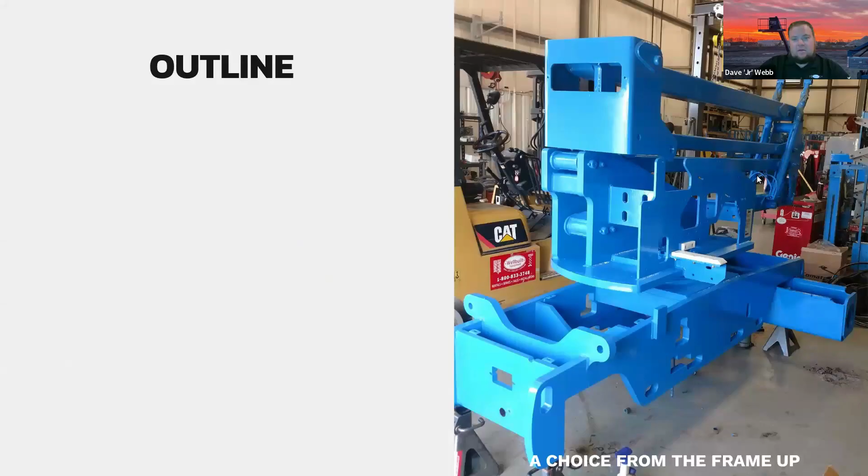So a little bit of an outline here about what we're going to go through. I'm going to do a little bit of the who, what, and where. So who are the key players in our industry, our factors in determining what MEWP we use, how to choose the right equipment, and then, of course, we always leave room for questions because that is our favorite part.

So let's go ahead and dive in. Here on the side, this is one of our machines. We took it frame all the way down to do a recon for a customer. And that's kind of the way we look at lift choices - they have to be from the frame up.

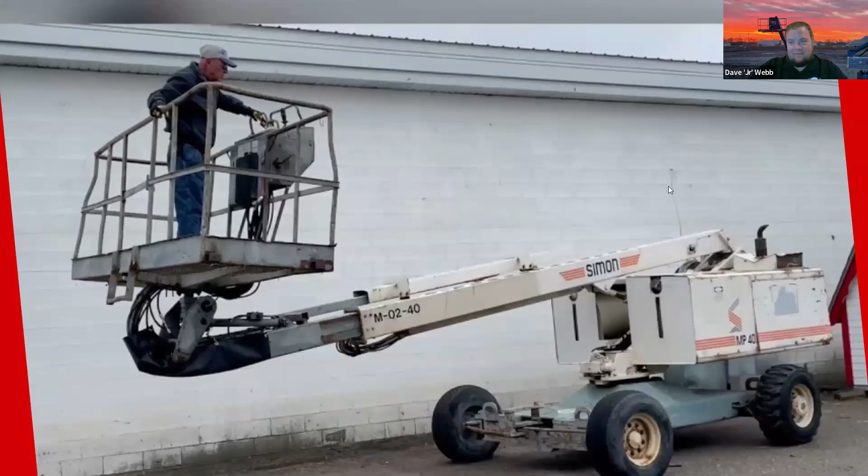So right out of the gate, I want to share this old photo for some of our older industry guys. You may be familiar with the old Simon MP series. This is back when the contractor booms were kind of in their heyday in the 90s. You can see not much safety devices, not many features on this machine.

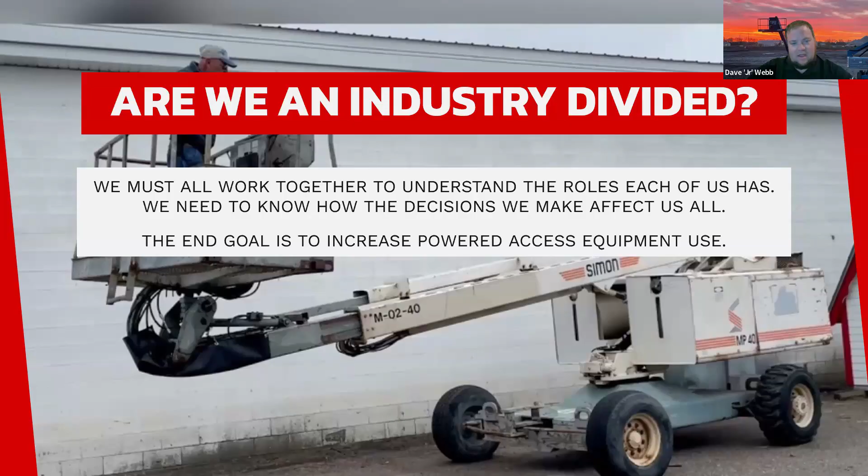So the question we have always on MEWP selection is, are we an industry divided or one that's united? This comes from a couple of places. We all have to work together to understand the roles each of us has. We need to know how the decisions we make affect us all, and the end goal is to increase powered access equipment use. Together we can change the industry and change the game.

That's our motto, always at work. And the idea behind that is we want to eliminate ladders on job sites. The ladders last initiative for us is something we really, really take pride in.

What this does is establish what everyone's responsibilities are, giving everybody an idea of their overall position in the industry. It helps us avoid blaming each other when problems do arise, and helps us understand that we all have to work as a team because we're all seeing the same problems, whether that's from a manufacturer, a standards organization, or all the way down to an end user. There are common pain points that we're all having right now.

So here we go. This is who is involved in the MEWP selection process. Starting with our standards boards and organizations, that's where the industry guidelines for manufacturing of equipment, training, and certification start. Then into a manufacturer, who designs, engineers, manufactures, sells, and provides support.

Then we have a couple of different types of equipment owners. In our industry, we really separate a small rental company who focuses on general rental from a larger rental company who has access-specific operations. And then also the equipment owners who are an end user, or COM as we call them — those would be people who decide to purchase a MEWP for their own company use or location.

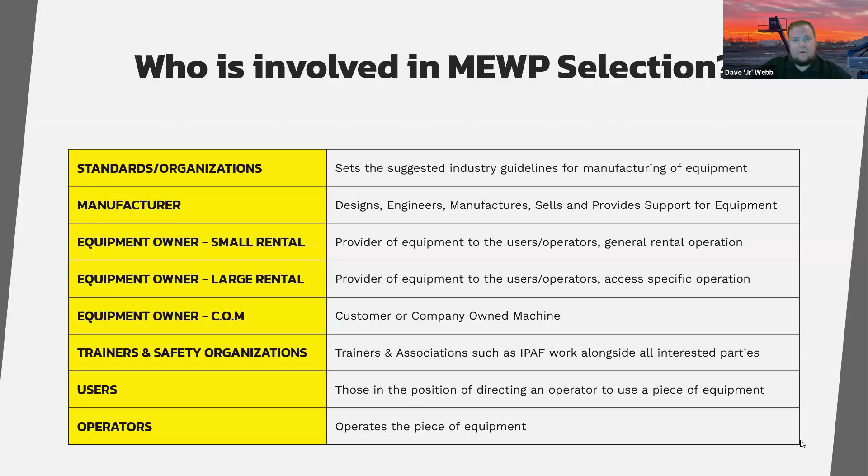So we're going to get into the what of the equipment. This is how we break down our four most common types of MEWPs. In this case, we're talking about things that are not truck-mounted units and not mast climbers, because in the general rental and equipment environment, those are kind of two separate categories. The truck-mounted guys almost have an easier time choosing a machine because they all have similar operating characteristics — it's more about height and reach — versus these other types of MEWPs we focus on in our training, which are more specialized in where they can and can't be used and the different types of things they do and perform.

So we break those down as scissor lifts, boom lifts, outriggered machines, and then push arounds — or as we like to call them, the new guy lift, because it's really fun to put the new guy up in a push around.

Then we have the where of how the MEWP selection occurs. On the side of people who aren't directly involved with end users, we consider that an office decision — that's your standards like ANSI, CE, OSHA, organizations, engineers, and manufacturers. I have a nice generic photo of a guy with some blueprints here. We have an equipment rental yard or a retail yard where someone's selling the equipment, and then, of course, we have work sites where hopefully, if you choose the right thing, you don't end up burying it down to the counterweight.

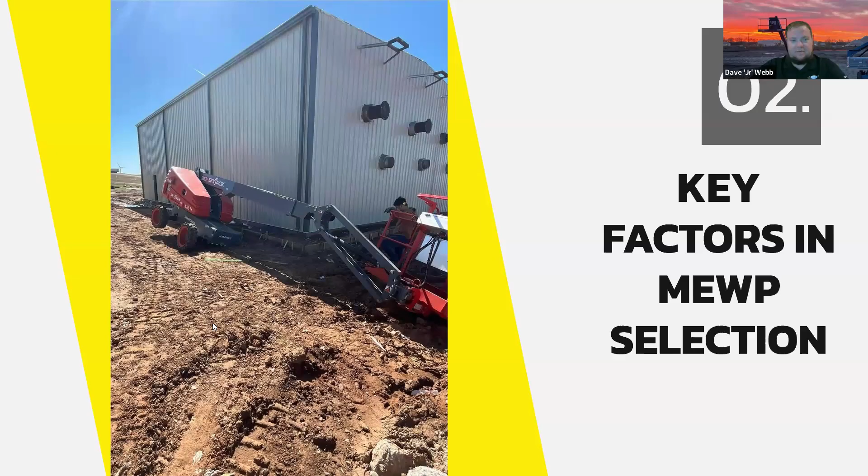So now we're going to get into our factors that we consider in MEWP selection. You can see right here, somebody made the unfortunate choice of driving too close to the form work and sunk a wheel on this machine. Here we kind of go into the details.

So what this is, so everybody knows, a lot of our presentation is going to be from a larger rental company standpoint, but we also work with small rental companies as well. I know everyone's factors are going to differ. The idea here is to show how we view those common points and how we can unite behind them to make the industry as a whole better.

So at the top of it, we have the price or cost. And that doesn't just include the initial purchase price, that also includes how we maintain it and the longevity of that product. Transportation and storage. How does it get to the work site where it's going to be used and where is it stored? So in an end user situation, it might have a different storage location than a rental yard or retail.

Availability of equipment. Is the ideal machine that we want to use available to use? Can we substitute it? And then we get into the height, reach, worksite conditions, and ultimately end user preference. The end user preference thing has become more and more of, I wouldn't say an issue, but a solution where the end user becomes very familiar with a brand. And because of that, they're used to its operating characteristics and don't want to change. So we're going to dive into the details of each of these here next then.

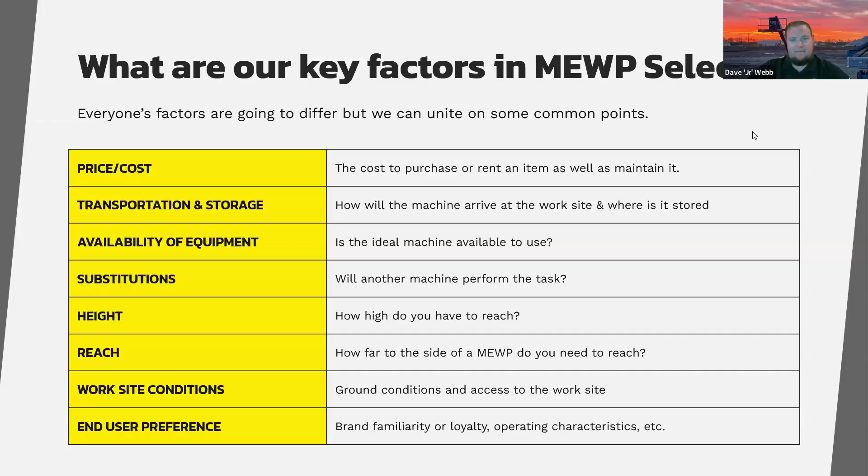So the main factor we're all united on, of course, is the dollar. And it's very important to everyone. The bottom line ultimately is determining a lot of business decisions. And that's why I always start at this point, is it seems like the dollar and the cost of something is unfortunately the ultimate deciding factor for anyone. And we'll kind of tie that all in and circle it all back.

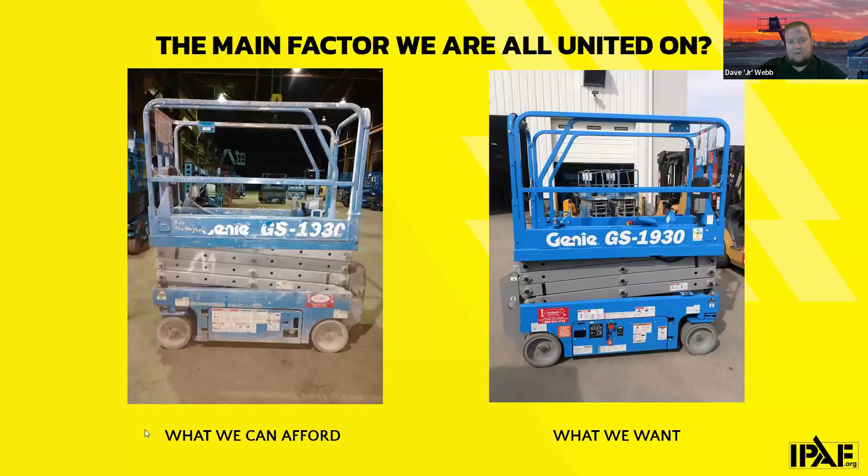So a little representation: when we sell equipment, we have this thing that occurs of this is what someone can afford, and what they actually want is a brand new machine. That big gap that we have is a lot of what causes the selection process to go away from its focus and towards a monetary decision rather than an informed product specification decision.

So what I do here now is we're going to break down how each of these things affects, from our point of view as a rental company, the big key players in our industry. So how does price affect our selection of equipment? From the way that we see it as a rental company, a retail service sales company, safety training company, this is our perspective. Again, yours might differ a little bit, but this is kind of how we view the whole process. On a standards board, standards must meet minimum requirements, and they can't be too costly to implement in design, and they can't be costly to adhere to after the delivery.

From a manufacturer's standpoint, they need to meet standards without adding extra cost. Raw materials and bolt-on costs ultimately determine product features, and then the price must be competitive in the market, especially with so many new companies entering it right now. On the rental company side, everything comes down to that low cost of ownership and low acquisition cost. Whether we want to admit it or not, ultimately, lower rental prices open up more opportunities for us as a rental company. It's not necessarily the product selection. It always comes down to whether or not the customer can truly afford to get that piece of equipment.

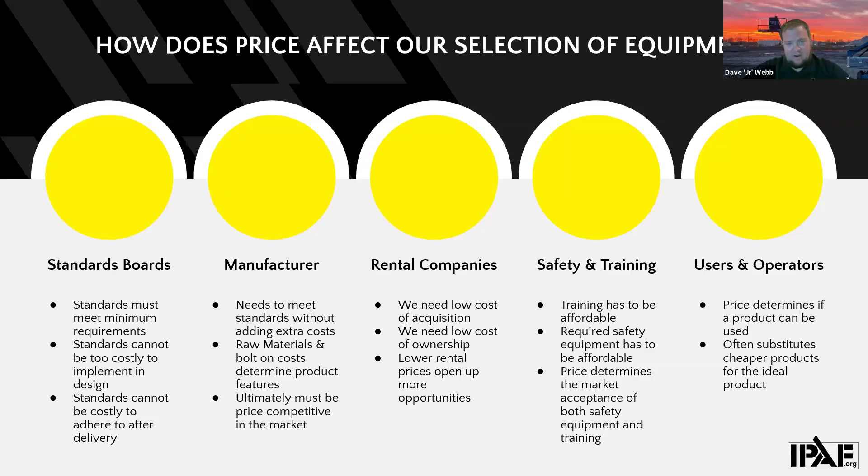On the safety and training side, the training has to be affordable. So part of that is if training takes too long, customers are less likely to do the training because it costs them to have their guys in a training session. Required safety equipment has to be affordable, and price determines the market acceptance of our safety equipment and training. And then we have our users and operators. Price determines ultimately if a product can be used. If they don't have the money in the job or repair, they can't do it. And they often substitute cheaper products for the ideal product because of that.

So this is what I call the results side of what has happened to higher prices without added features. In other industries throughout the years, what we have seen in equipment is an increase in features that have ultimately gained something for the operator. For example, right now, if you want to go buy a skid steer, you're going to get an enclosed cab with air conditioning, heat, backup camera, extra safety devices, maybe a Bluetooth radio, high flow, higher capacity. All of those things that are added ultimately justified an increase in cost. Whereas in the aerial lift industry, we have seen large increases in costs throughout the industry from the manufacturer all the way through an end user without getting a lot of huge advantages to that.

So, on the standards side, when standards become too costly to implement or take too many resources, we lose innovation and product features. As an example, load cells on lifts did not give operators more, they actually took it away. And we know that people were overloading the machines. It's commonly known, but right now we have an issue that customers will only take older machines because they know they can overload it versus a new one.

On the manufacturer side, when price is the sole focus, a brand no longer becomes a selling point on features, but instead becomes a commodity with no product separation. The focus on selling at the lowest price without giving us the better product has really caused an issue where all we have is a bunch of the same product with different paint schemes, really, and some different bolt-ons.

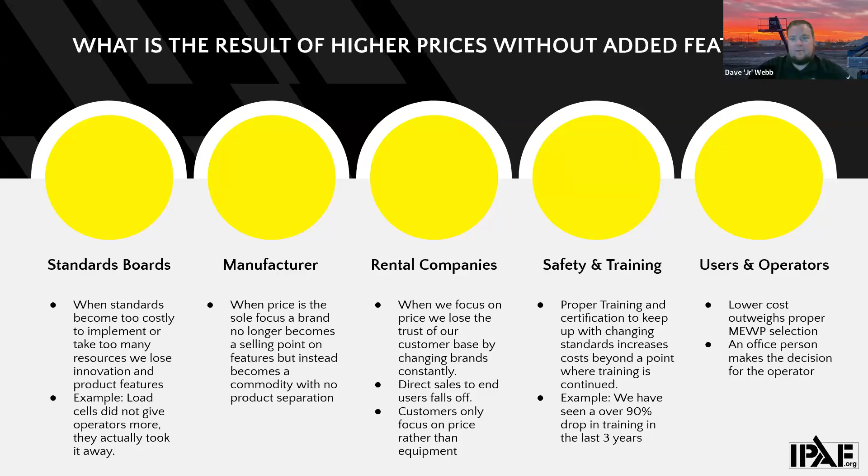So then we have transportation and delivery of the MEWP. And again, this is our stuff that we have. If you go state by state in the United States, if you travel to Europe or you're in Canada, somewhere else in the world, obviously the road limitations are completely different than what we have here. For example, the commercial driver's license limit in Europe being 3.5 metric tons versus here it's much larger. So when we're trying to decide what MEWP a customer can ultimately use, we have the weight to consider. So what are the vehicle requirements that they need to get it there?

If we stay under 6,000 pounds with a trailer, there's no need for electric brakes. That's a much larger customer base who can then tow it. If we go under 10,000 pounds, including the trailer, they stay under a commercial driver's license. That trailer does now have electric brakes, but we still are under that limitation where they need to go through the process to get a CDL. On most of the rollback trucks, unless you get a high capacity one, you're maxing out at around 26,000 pounds. They may hold more, but they'll never scale, especially with a boom lift on there and all the counterweight forward.

And then we go up to our tractor trailers where they're under 48,000 pounds for our whole load without having to pull a permit. And again, we have axle limitations as well. So if we're overweight on an axle on a larger boom, we have to pull a permit for that depending on where we're going. A good example of this would be booms above 125 feet typically are too heavy for us to carry without a permit, depending on where they're being delivered. And that added cost prevents someone from getting the machine ultimately.

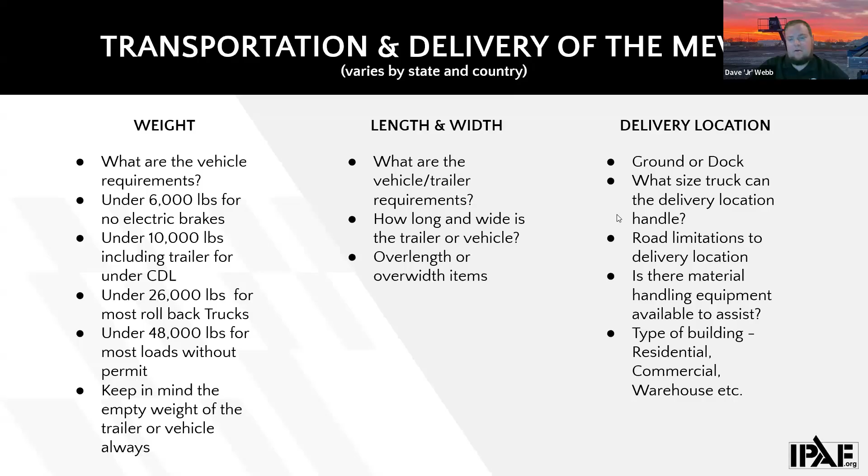So now we're going to go back again here. How is transportation and delivery affecting our selection of that MEWP? So a manufacturer designs and manufactures a machine based on the target customer base. If a machine meets the specs but cannot be delivered or requires additional cost to deliver it, it negatively affects sales. So a good example of this is in the chimney industry.

For instance, our customers need a large articulating boom, such as a Z80 from Genie or an 860 AJ from JLG. That machine allows them to reach up and over the rooftop, but we can't always get it there. So we're substituting a spider lift for those cases because they're lightweight and they won't damage the property.

If you're a smaller rental company, you may focus solely on customer transportation rather than delivery, meaning you're taking into account what vehicle they're always going to pull your trailer or their trailer with. Customer ability to transport may become the priority then in your decision making for what you give them. You might not have CDL drivers and you may not have larger trucks.

Then we get up to our medium to large rental companies. In our case, what we're looking at with equipment is, are we going to need to purchase more trucks or trailers to keep up with delivery demand? Is a large enough truck available for that day to do the delivery, or are they booked out? And then can that truck, since we're going to a larger truck, fit into the delivery location like we were talking about?

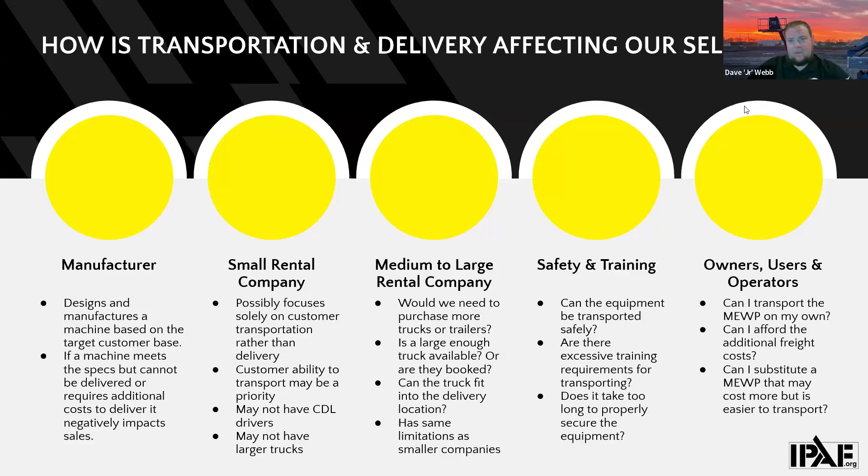Then we have availability. So availability for us is huge. As we say at our company, one is none, two is some. So buy a truckload, which a manufacturer I'm sure loves to hear. Again, this is from our point of view, how we view the availability side.

On the manufacturer side, is there a need to make additional models? Do those additional models compete with existing models? And can we get a more diverse product line to our customers without increased overhead? Obviously, we all know and are aware as owners and operators of equipment that that design cost and the upfitting to do manufacturing on an industrial scale is extremely expensive and cost prohibitive. And that's a hard decision that many companies struggle with to see if the market viability is there before they start to make it available.

On the small rental company side, what we see is they have a limited MEWP fleet. They may only have one MEWP in a product category, and they're often substituting a different machine. The primary reason for that is they either do not have the capital to invest in a diverse product line, or they don't need to.

A good example of a small rental company is they may have one push around lift, which could be like an AWP 30 from Genie, as compared to having an AWP 20 and an AWP 30. They have the one. They may only get a 26-foot narrow electric scissor lift instead of the more common 19-foot scissor lift because they only want to own one of that unit. And the same thing transfers to rough terrain scissor lifts and to boom lifts and to tow behinds.

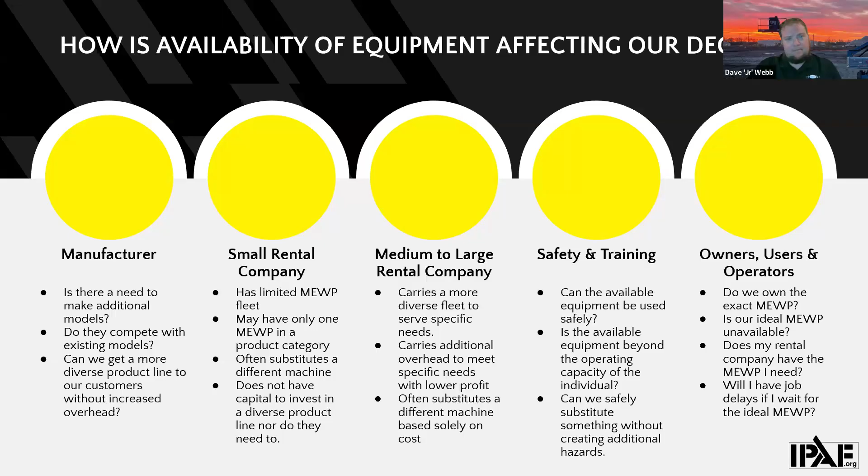So availability goes into substitution. On the manufacturer side, are we making MEWPs that are too easy to substitute for and do not serve a specific need? As an example, a micro 19 can often be used in place of a standard 19. A 32-foot scissor is often bought in place of a 26-foot scissor to increase our utilization.

This is something I've tried to talk about multiple times, and it seems to fall on deaf ears, that we have the same number of 19-foot machines that we did 10 years ago. It's just that instead of having one version of a 19-foot machine, I now have four. Ultimately, they do serve specific purposes, but those increased costs and lack of utilization become the reason why we don't fill the other gaps that we really need to fill in a rental company operation.

So then our small rental companies, if substitutions cover most needs, they will not buy a specific product. Going back to the same example, they buy a larger model to cover a broader range of rentals. They often substitute a larger machine, as I said, and they often substitute a different MEWP, such as an RT scissor for a boom lift.

The reason why is maybe they only own one of each. Their regular rental customer comes in, the only one that's available is an RT scissor lift, and that's the one they take and adapt to the situation. Is that necessarily the safest option? No, but it is what happens constantly on a regular basis at a rental company.

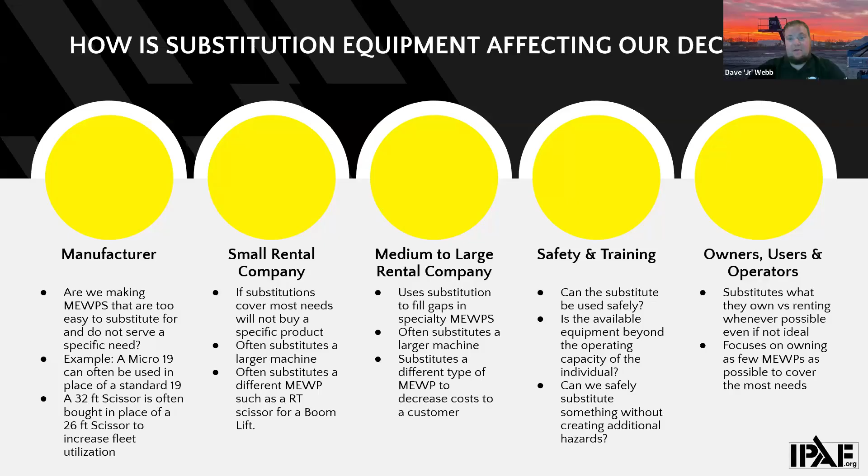But what if all those factors mean nothing? I can choose anything I want because we have hundreds of lifts to choose from. This is the scenario that we're in most of the time. Just like farmers, you've got questions, we've got answers.

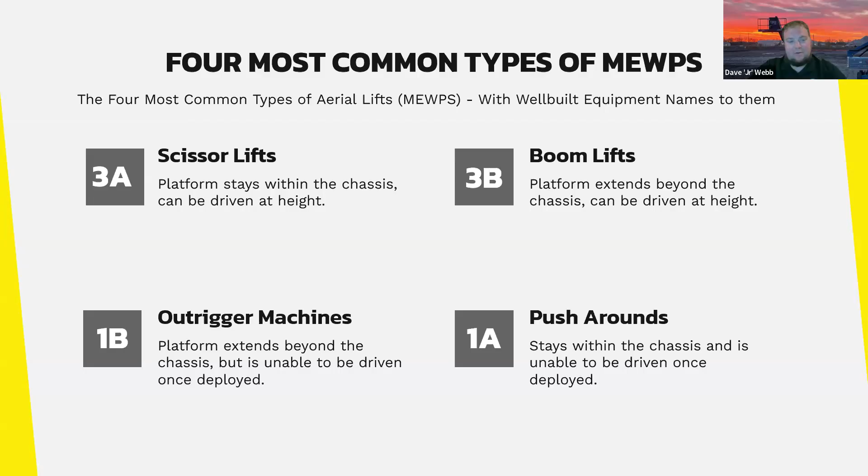So this is our chart of how our rental division would choose the right MEWP for a customer. Equipment specs ultimately fall into two different categories: our needs and our wants. Our needs are how high do we need to go, how far in do I need to reach, and where am I going to put the thing. So is that, how small is the door I have to drive through? Do I have to go through a gate? Is it only a dock delivery and the dock door is only 6 feet wide or something weird like that? And can I get there in those conditions?

On the want side, we have capacity. And the reason why we separate capacity into the want side is almost always we can increase capacity by getting a customer an additional piece of equipment, or we substitute a material handling device. So that would mean the customer, if they're a garage door company, they really could use a scissor lift if it picked up 2,000 pounds to install a roll-up door. Ultimately, they end up getting a small scissor lift and renting a forklift to go with it. So we separate capacity as a want because it's easier to solve a capacity issue than a height and reach issue. If you can't get up there, it's kind of irrelevant what you're bringing with you to do the work.

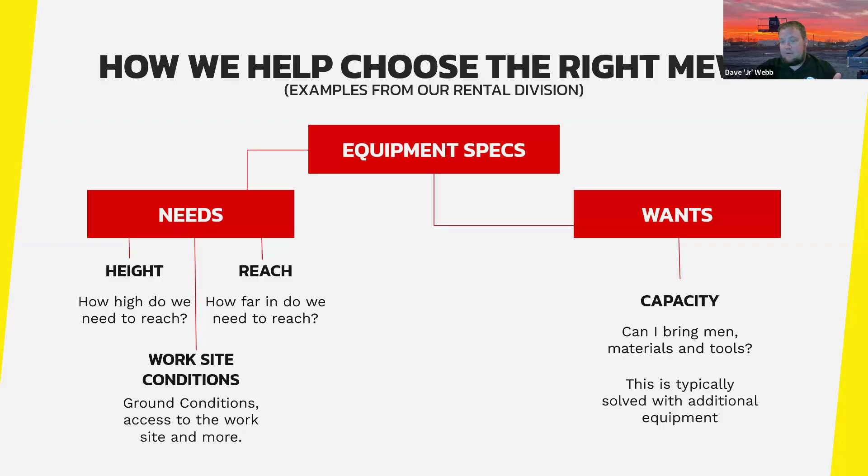So these are our tools of the trade. When we go out to a job site for a customer, we're using a laser measuring tape most of the time. If you don't have these and you're doing job walks for your customer, or you're an end user trying to figure out what equipment you need, we really suggest the Bosch series of them. The reason why is they have a digital level built into them as well, so you can use that to determine your slope in two directions very quickly and make sure that machine is going to operate where you intend on setting it up.

And then when we're outside, we use a golf range finder or a shooting range finder. The reason why we use those is they have a little bit of zoom and they're really accurate, usually within 3 to 6 feet. Buy a little bit nicer one, it's maybe $100 more. Don't cheap out on the golf range finder. By far, it is worth the $100 to $200 more to not have to send a customer a different lift and piss them off because you bought a cheap rangefinder instead of a more expensive one. We really like the Bushnell ones, they seem to work the best, but it's kind of a dealer's choice on what you really like to use.

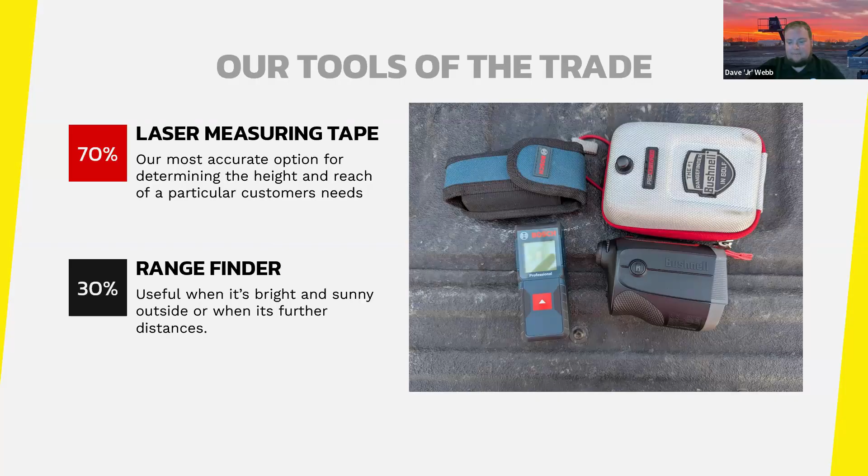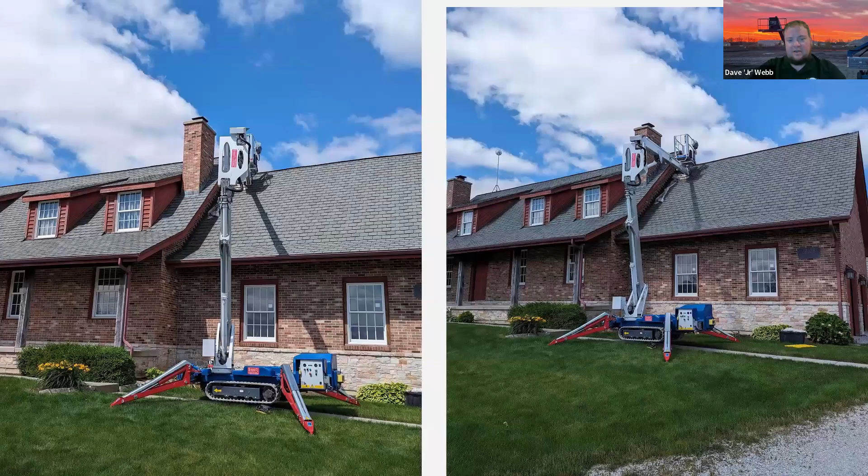There's a weight restricted road with multiple bridges. There was no other way to get to this safely.

Now, a normal person might say, I get the roof pitch is a little steep, but you could still walk it, you could set up a scaffold. In this case, these are brand new architectural shingles. They have very intricate designs on them. You 100% cannot walk this roof. If you do, you void the warranty.

So we are trying to help our painting contractor and the chimney guy reach up here. So what we do, because you can't get a clear line of sight right over the top of this, is we go to the end of the structure. We're going to measure in and then measure up from the end wherever we do have the clear line of sight.

And that's going to help us determine what piece of equipment will reach it. And again, you can see there's no driveway here. We easily could have just given him an 85-foot boom and he would have reached this no problem.

So when we do a worksite inspection, this is the same type of worksite inspection that an operator is doing. We identify the hazards and notate them. We measure the depth or reach needed. We measure the height needed. We examine the ground conditions. We physically walk the entire area the piece of equipment is going to be delivered.

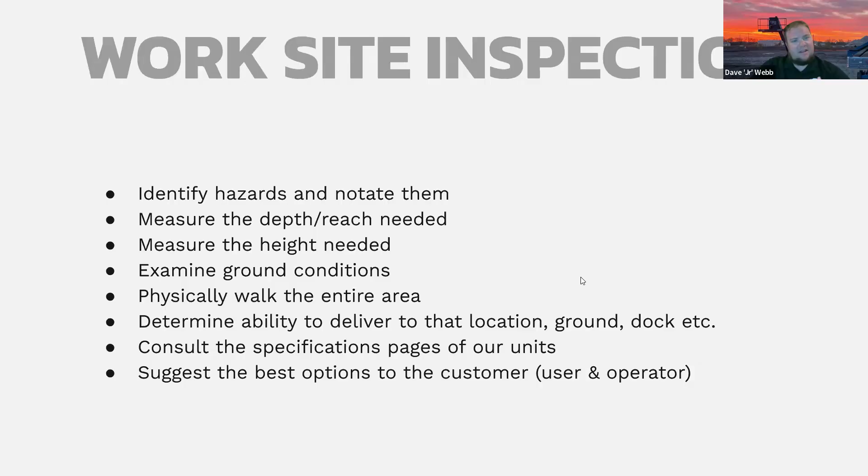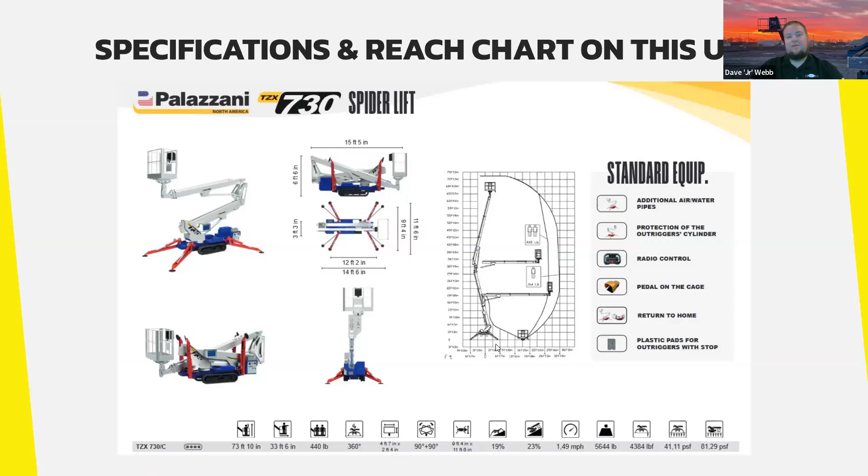So this is the specifications and reach chart page for this Palazzani unit that we had out there. So you can see here's our reach chart. It gives us our outrigger footprint. And of course, on this one, we really need to take into account where those outriggers land. We call that our net side reach. So everybody has a side reach, let's call it, in their spec sheet. We really care about where you can actually reach when up against the edge of a structure.

So again, we go back out here, you can see the customer had flower beds and landscaping they didn't want us in. Measured from there, did we reach where we need to go?

And the important thing here is not all spec sheets are the same. We say this time and time again because there's an incredible amount of dishonesty that goes on in a manufacturer's spec sheet. And if you have taken the time to go through the details of the spec sheets that we have with customers, or you have tested them and measured them, you know exactly what I'm talking about. Or worse yet, you've delivered a piece of equipment that should reach according to the reach chart where you measured to in great detail, but it doesn't even come close.

So we always confirm this with a function test. What that means is if we're using a piece of equipment and we're unsure, we have all of our rental fleet that we have tested it and measured it to confirm the reach chart is accurate. And any reach chart that isn't accurate, we have updated so we know the specific places that it reaches.

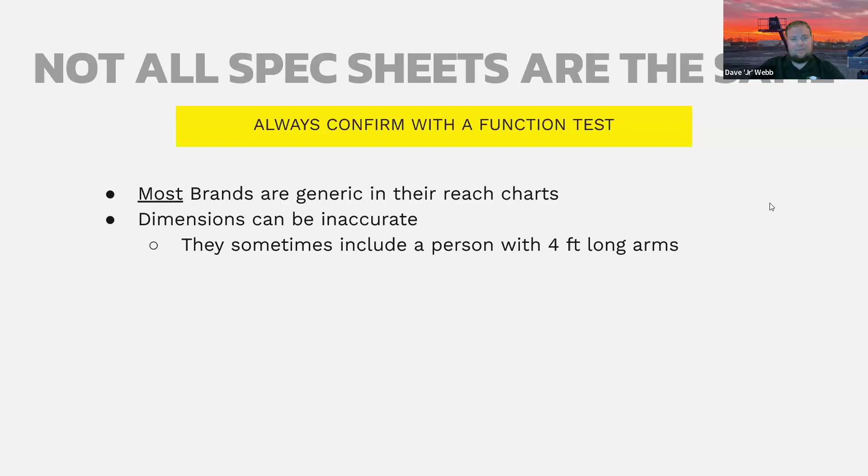Most brands are generic in their reach charts. The dimensions can be inaccurate. They apparently sometimes include a person with 4-foot long arms. Do not go by the model designation on the side of the machine. This is an important one that we hammer home with all of our customers. As an example of this, a 26-foot machine could only be 25 foot 6 tall.

Manufacturers do allow for tolerances in their spec sheets. It states that on every reach chart with a plus minus of what the range is, and the spec sheets can vary in the same year, make, model based on how those sensors are set up.

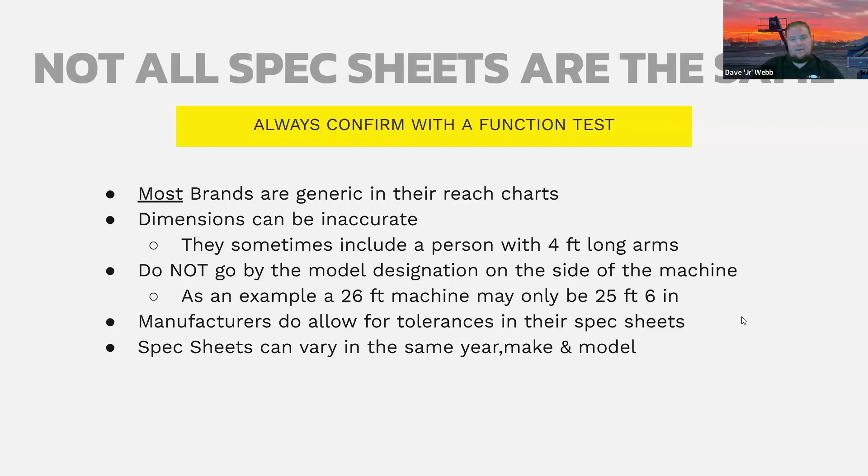In position function tests are important for these reasons. Again, if you guys have done the IPAF certification or training, one of the key components is to make sure the lift actually is going to perform in the location you set it up. As an example of this, your moment limiting devices on every machine ultimately determine where it will go to and how it will operate and if it will have that reach.

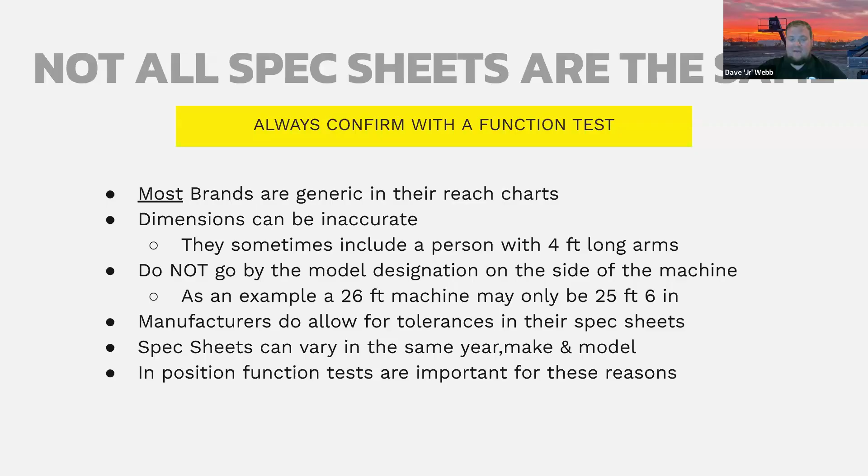Where you go to set the machine up, if you have a tolerance for a slope of only half a degree to get full performance in the machine you're using, but it turns out where it's set up is a degree and a half, you're going to lose performance in that machine based on where it is set up at.

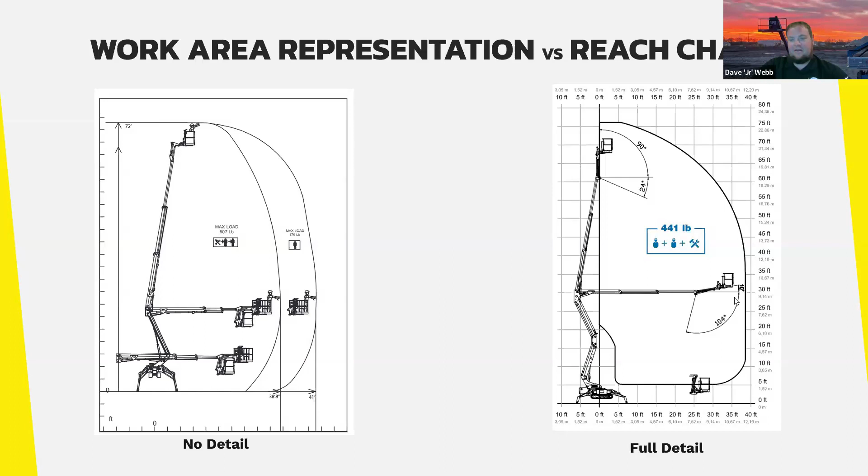So now we're going to get into all the different types of equipment. You guys will be very familiar with these if you're from the industry, so we'll kind of quickly breeze through them. We have some of the cool new things that we have here. We're usually pretty early adopters because we work in a lot of very old buildings, old warehouses, old industrial manufacturing facilities, and need a large amount of specialty equipment to accommodate our customers.

So in a Type 3A, we have electric scissor lifts. Then we go up to an electric mast lift.

If you're unfamiliar with these, the most common application we have for these is someone reaching over a mezzanine, over a window, trying to get up next to an air conditioner unit or an air compressor, where they can physically stick the base of the machine underneath the structure and then reach over the top. In our case, we keep these electric mast lifts from Genie with 3 different basket configurations to suit our customers.

You see here with no deck extension, that allows for maximum workspace. We have it with a deck extension, and then we also have a ceiling tile basket for this machine. So in this case, we purchased the extra platforms to have one machine that we can use for 3 different very specific instances for our customers. That increases your safety, and helps them get the exact MEWP they need without increasing costs to some other weird specialty piece of equipment.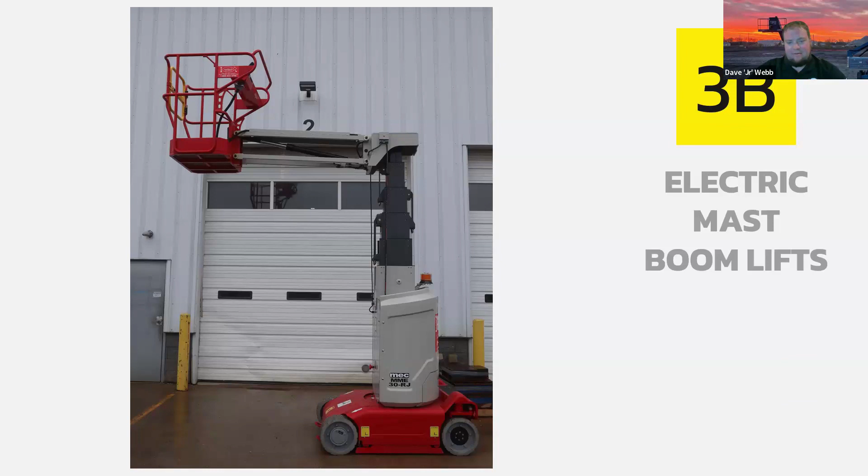Then we have electric mast boom lifts. So this is a hybrid of that Genie GR20 we had, and then our Z30s. This one commonly comes into play where we have low floor loading capacities. We need a narrower machine, or the customer needs to reach sideways and drive parallel to a wall or something that they're working on while reaching over another object. The biggest limitation to these types of machines is they can be slower and they also have limited basket capacity.

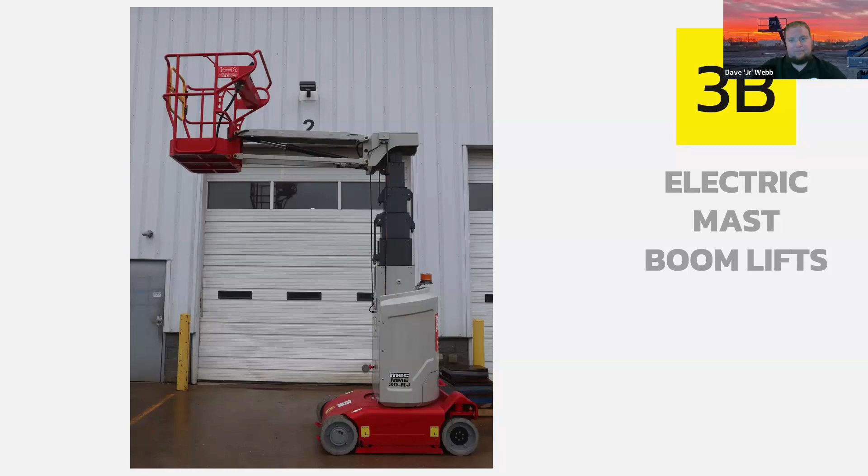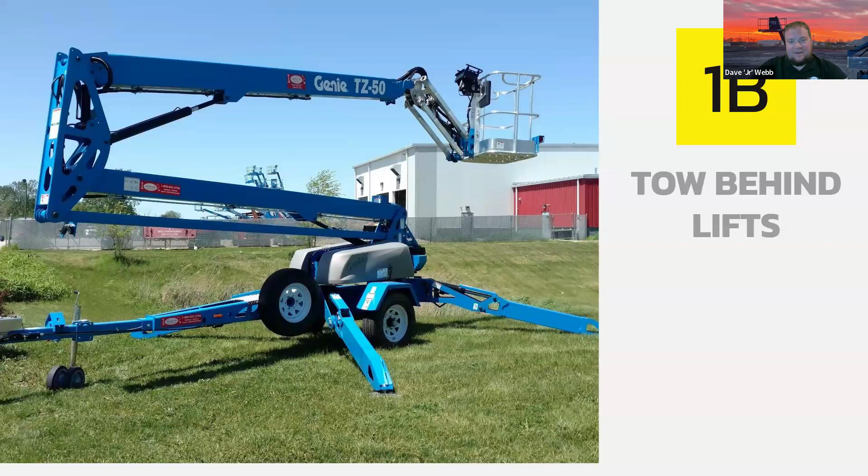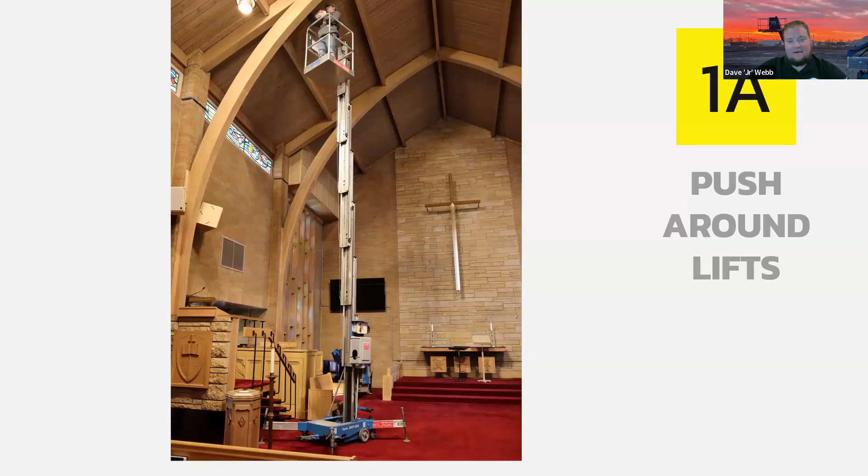And then, of course, we have push around lifts. Really, from our standpoint as a rental company and for our end users, while the push around lifts go back to the origins of the MEWP industry, they are an "I'm only going to use them when I absolutely have to" type of use case. For us, the most common place that these go is churches or schools or auditoriums. We also have straddle kits for our Genie machines to go up and over pews, for people who need to transport and tilt them back into trucks. In this case, they're very easy for us to get upstairs into buildings, and that's the primary use case for AWPs in our fleet.

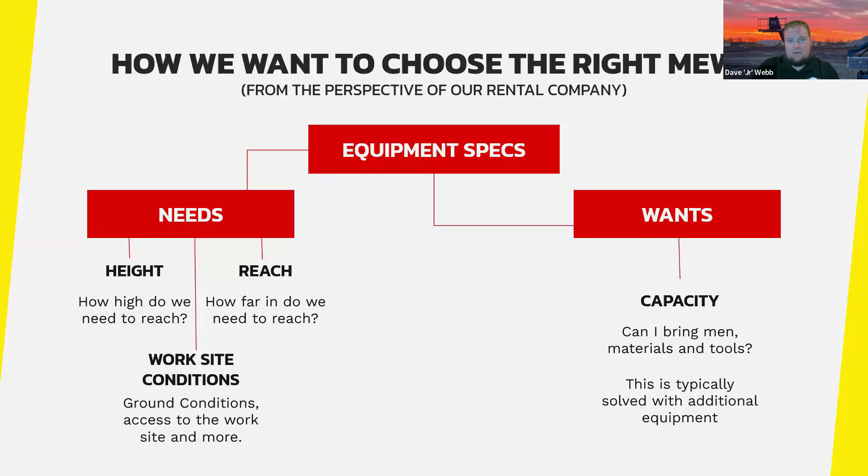So now we're going to circle back to this, kind of tying everything all together. So what we did is I changed this chart to how we want to choose the right MEWP. So again, this is that same diagram I showed you before. This is really the way that we want to choose the right MEWP. What actually ends up happening is this is how the user or operator chooses the right MEWP.

So the needs become the cost, what is the cheapest option, and that includes what's the cheapest option to maintain and own. Availability, is it available and can it actually be delivered or used there based on ground conditions? And reliability and ease of use. What MEWP has the least items that can malfunction and is going to cause me issues on a job site? The wants fall into a totally different category.

What we as safety trainers, the manufacturers, industry want is we want a customer to choose the right MEWP based on the machine specs, because the machine specs make the safest, most reliable choice in our opinion. So that's our height, our reach, our capacity, our weight. Can it be used on the slope in those ground conditions? The unfortunate reality is that the customer, the end user, the operators have all fallen more to that need side of cost and availability and reliability more than the actual choices that we deem the appropriate ones to be.